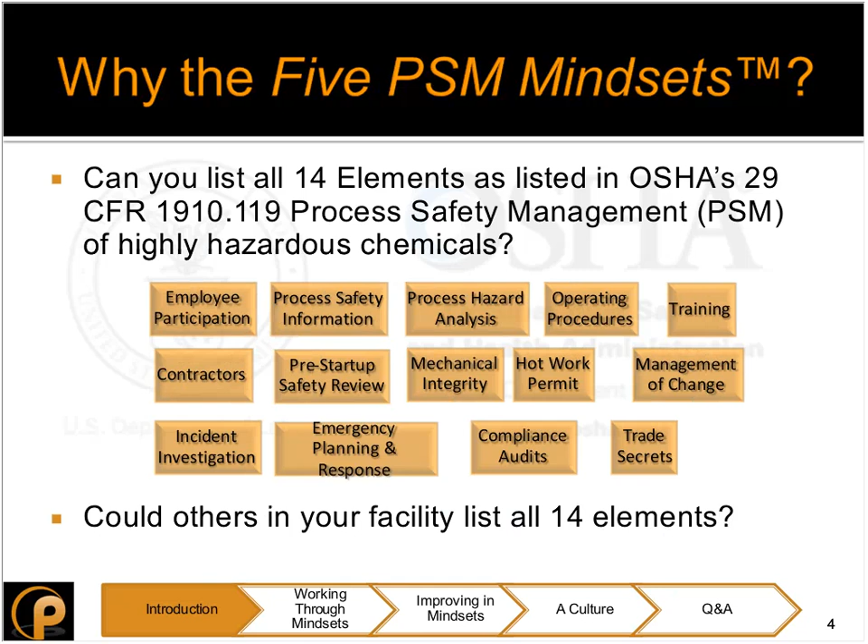Another question I have is, can you describe how your work connects to all 14 elements? So as you look through the elements below, do you see how your work directly connects to hot work permit, management of change, incident investigation, process safety information? Again, most people only see connection to the 2 or 3 that they're involved with directly on a day-to-day basis.

And a follow-up question to that, can the other people in your facility connect their daily work to the 14 elements?

The next question is a matter of coverage, being covered by PSM, and it really gets to the heart of why PSM is required. So is your facility covered by PSM? And if the answer is yes, are there components of your facility that are not covered by PSM? Most likely there's some area of coverage, and that's why you're calling in today.

But what I'd like to ask is, is the intent behind PSM restricted to just covered facilities? Covered facilities are spelled out in the standard as those having more than 10,000 pounds of flammable liquids or above the threshold quantity for chemicals in their Appendix A. We'll talk more about that to come.

Let's say you own a facility and you have an 8-foot tall vessel, 3 foot in diameter, and you have anhydrous ammonia, that's 3,560 pounds by weight. The Appendix A states that you have to have more than 10,000 pounds of anhydrous ammonia to be covered under PSM. Let's say in your facility you don't have any other chemicals that are in Appendix A or that meet the flammability quantities or guidelines. And so the conclusion is that you're not covered under PSM.

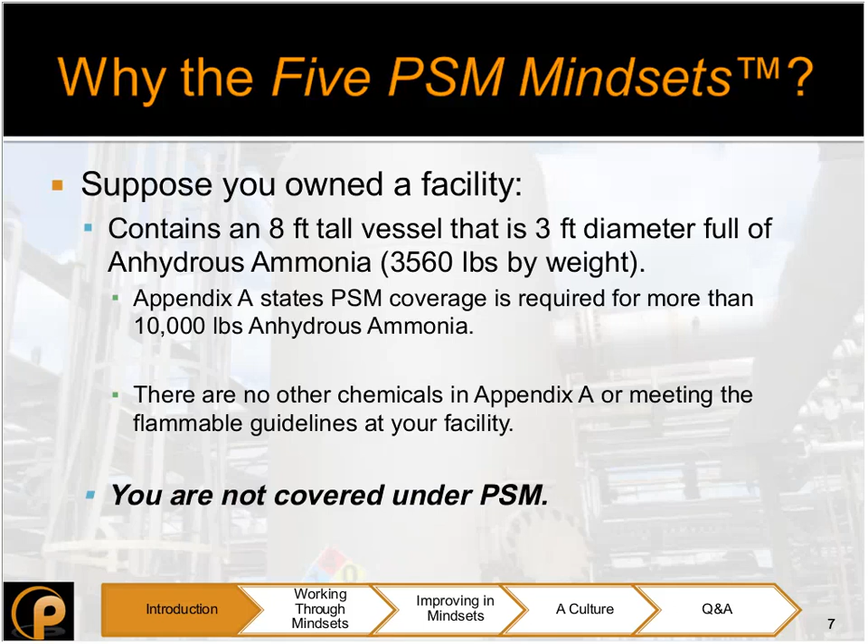But let's take this picture a little bit further and ask the question, again, picturing your 8-foot tall, 3-foot diameter vessel, and even picture it in the room with you there. As an owner of that facility, which of these 14 elements would you consider unnecessary for the safe and long-term operation of your facility?

Would you not perform mechanical integrity? Would you not gather and collect your process safety information? Would you not institute any kind of management of change or compliance audits? Even though you don't have to comply with something, would you be making sure that your procedures are actually doing what you said they do?

The real answer is that all of these elements, to some level of degree or detail, are necessary for long-term safety and prevention of a catastrophic failure, even for your small quantity of chemical.

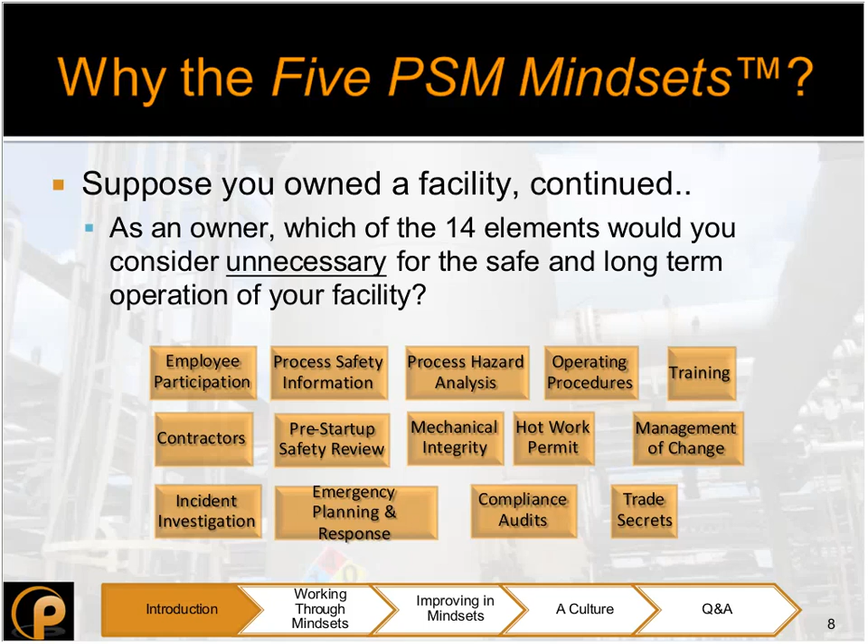The real point here is that it's not about a regulation. The PSM standard was an effort and a collaboration between the government and industry in the late 80s and early 90s to find ways to keep petrochemical facilities and the people working in and around them safe. You can make PSM as onerous or as simple as you decide, but it needs to be based on risk and practicality.

So you may have different levels and details in your documentation, but the reality is that all 14 of these elements can apply to any facility operating with any hazardous chemicals.

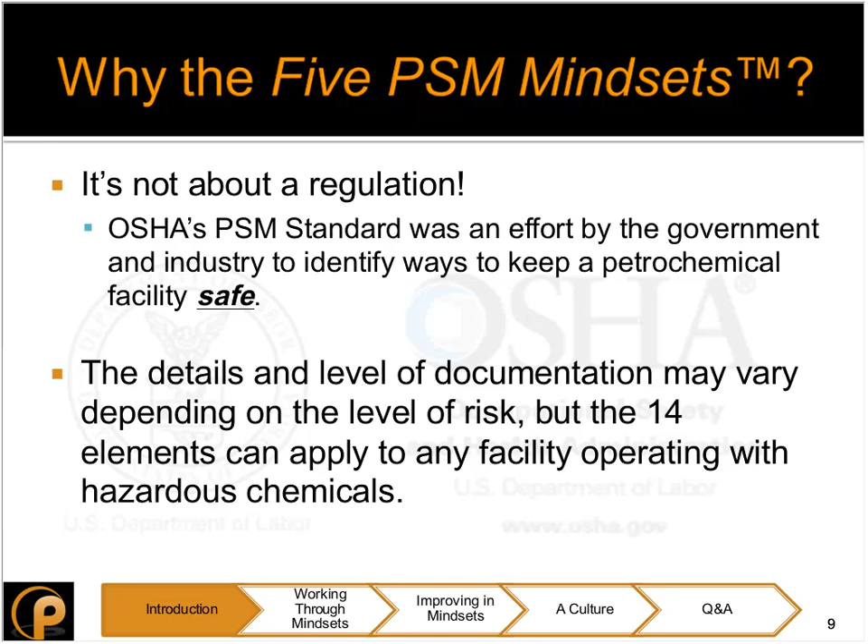So what we've done here is distilled the 14 elements into 5 PSM mindsets. Those 5 mindsets are: first, identify the hazard; second, communicate the hazard; third, protect against the hazards; reevaluate the hazards; and finally, transparency about the hazards. We'll go into more details about those in the coming slides.

They serve three main purposes. First, one of the first questions I ask is how many elements can you remember? Most people only remember 2 to 3. Some remember 5. If you work with it day-to-day, you may remember 10 to 14. But the 5 mindsets help act as a memory tool for recalling all 14 elements, and they're actually in order.

The second purpose is to help emphasize the intent behind the PSM elements, because it's not just about meeting a bunch of regulations, it's about keeping people safe. These mindsets can help focus in on what's important. And thirdly, getting back to this idea of PSM for everyday use, it helps simplify the approach to PSM for anyone in your facility.

So let's work through these mindsets and get an idea of what it means to work through the lens of each mindset. We'll start with identifying the hazards.

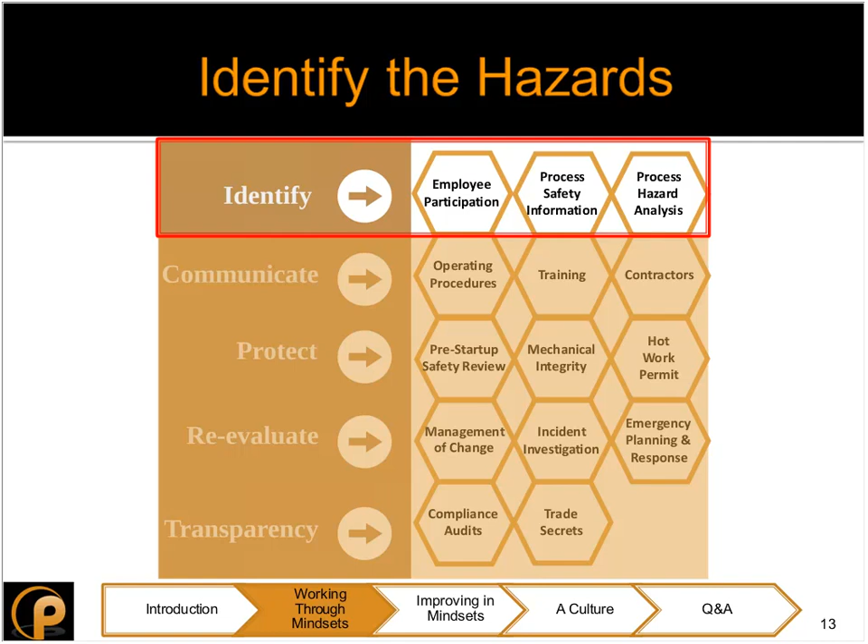If we want to be successful in identifying hazards, it's going to require employee participation. You need employees' observations, experiences, and situational awareness to be successful in identifying hazards. As an employee yourself, that is a responsibility that is on you and each one in your facility.

When I worked in a refinery, it was common to see employees who felt frustrated that they weren't being heard or that their ideas weren't being taken seriously. When I worked in distillation, I saw that operators in particular are on the front lines. They can tell you the warning signals they see from the process or from walking around the field day to day.

They were usually able to describe the issue. They may not have known the exact root cause or the chemistry behind it, but by listening to their observations and experience, that was key for effective troubleshooting and addressing the problems. So listening to your employees, and as an employee speaking out and participating in the process, is a critical first step in identification.

The next piece of successful identification requires accurate representations of reality, or solid process safety information.

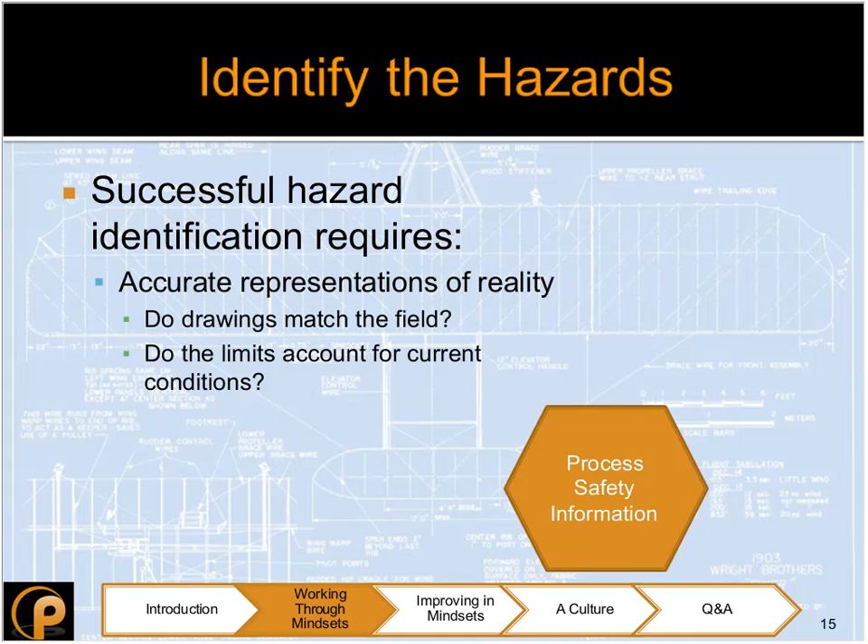And then lastly, in this mindset of identification, we have process hazard analysis. A PHA really brings together employee involvement and accurate process safety information, tied together through an effective methodology of your choosing. Even though PHAs can be grueling, this is where the insight from knowledgeable people can come together to explore what can happen and how to prevent it. A trick here is to not just use this as a paper exercise, checking the box that we did our PHA. Really use this as an opportunity to tie in the various process safety information coming from multiple departments, your mechanical integrity group, operations, engineering, and create a document or repository that can be a resource for anyone in the facility to better understand the hazards of any given drum or unit.

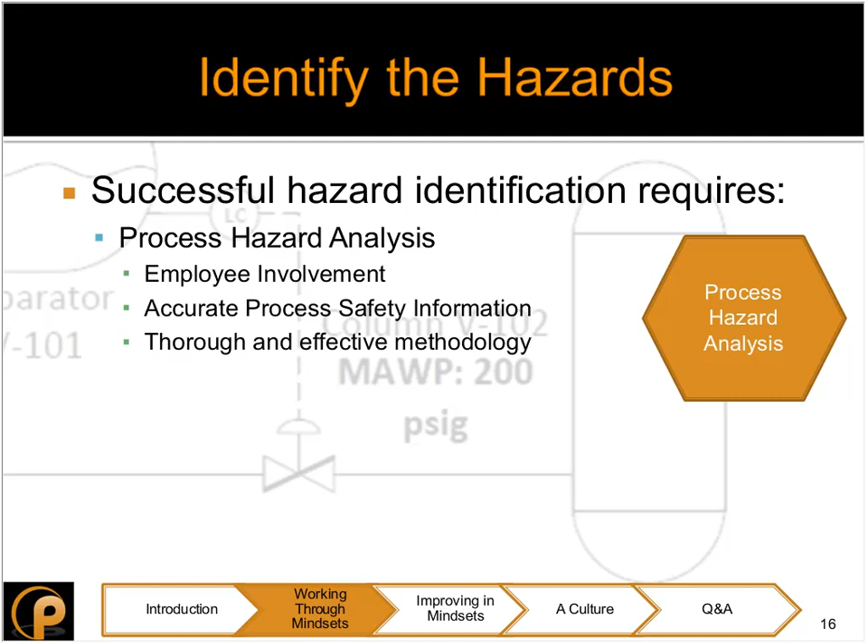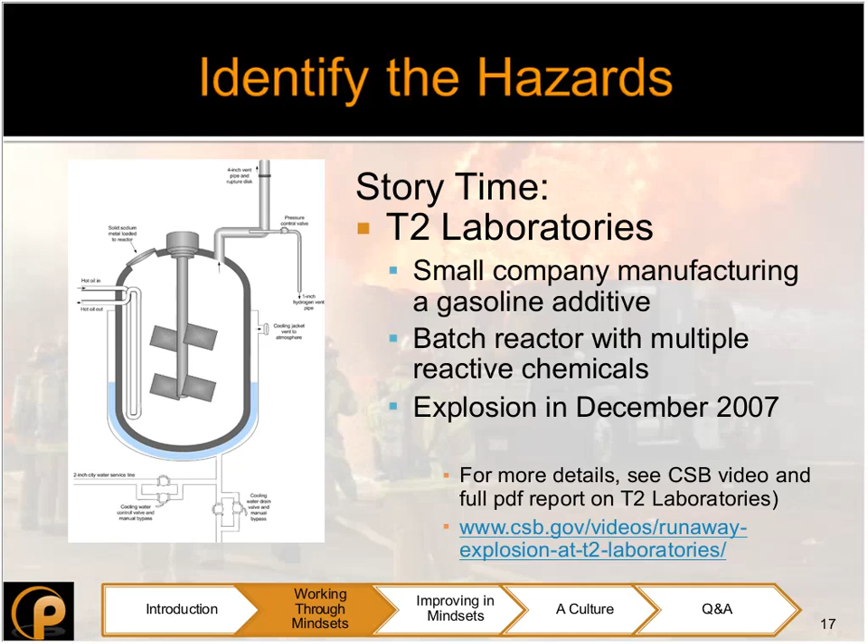What we're going to do as we talk through the various mindsets is tie it to a story about what happened to T2 Laboratories, a small manufacturing company that made gasoline additives out of Florida. They used a batch reactor with multiple reactive chemicals, and unfortunately they had an explosion in December of 2007. The CSB, Chemical Safety Board, did a video on T2 Laboratories that you can find by searching T2 Lab and CSB, and there's also a full PDF report that goes into more detail than we will cover here. But let's look at identifying the hazards.

Remember, there was an explosion here, so we're looking at things that could have been improved. The first piece is employee participation. They had two owners, a chemical engineer and a chemist, and though they had training from their degree backgrounds with reactive chemicals, they hadn't worked with reactive chemical processes in the field. So sometimes what you don't know, you can't participate in or contribute to. There was more experience they could have had.

Process safety information: because their reaction wasn't fully understood, they didn't have in the process safety information the fact that a runaway reaction could happen at high temperatures. They had tested the reaction up to 380 degrees Fahrenheit, but unfortunately the after-action review by the CSB found that at 390 degrees, just 10 more degrees, was where a runaway reaction would begin. Normally, if that had been known, it would have been included in their process safety information, but it was not identified.

And then lastly, process hazard analysis. This was not a PSM-covered site, so no PHA was required, and there was no documentation that one was performed. You may be tempted to say, well, that was them, we're PSM covered, it wouldn't happen here. But remember, if you have a check-the-box mentality of what's required and what's not required, you can still find yourself in the same pitfalls.

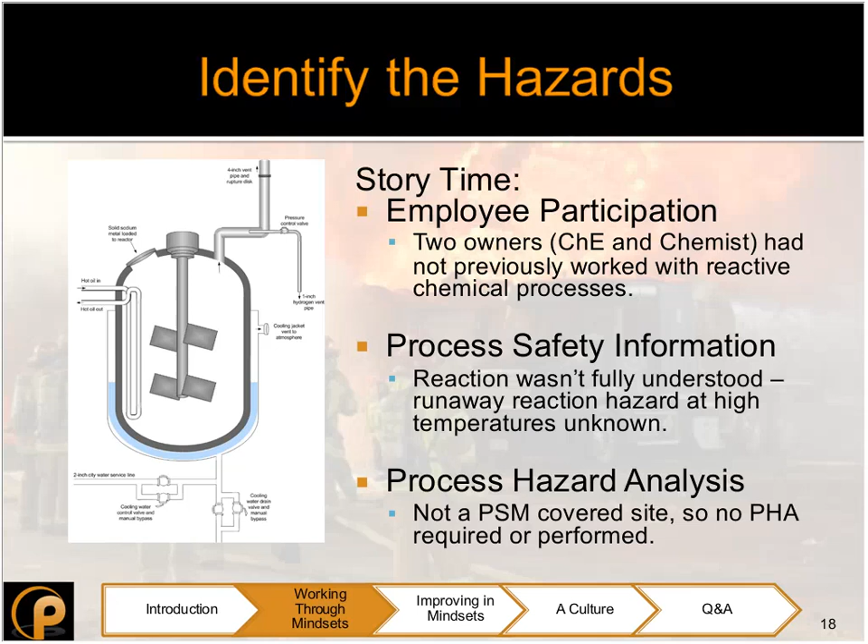So after we've identified the hazards, we'll come back to our story in a few minutes. We need to communicate the hazards in an intentional way. The PSM standard lists out operating procedures, training, and contractors as ways of communicating.

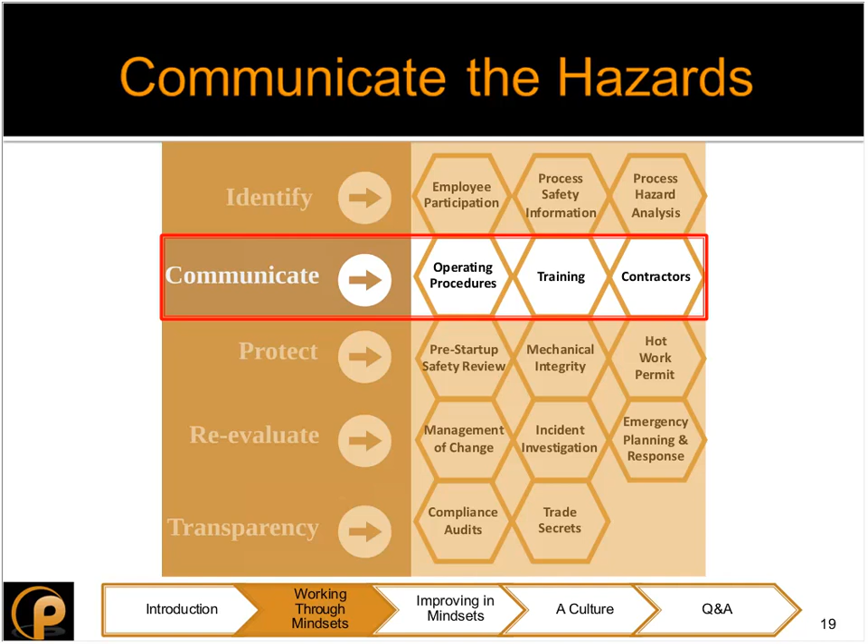So the first thing that communication successfully requires is procedures. Operating procedures are given a specific call out in the standard. Maintenance procedures show up in mechanical integrity, but operating procedures are where people are directly interfacing with the process as it's running, so there's a high risk involved. The higher the risk, the more detailed the procedures need to be. They help clarify expectations, reduce guesswork, provide a common approach, and should be accessible to all who need them.

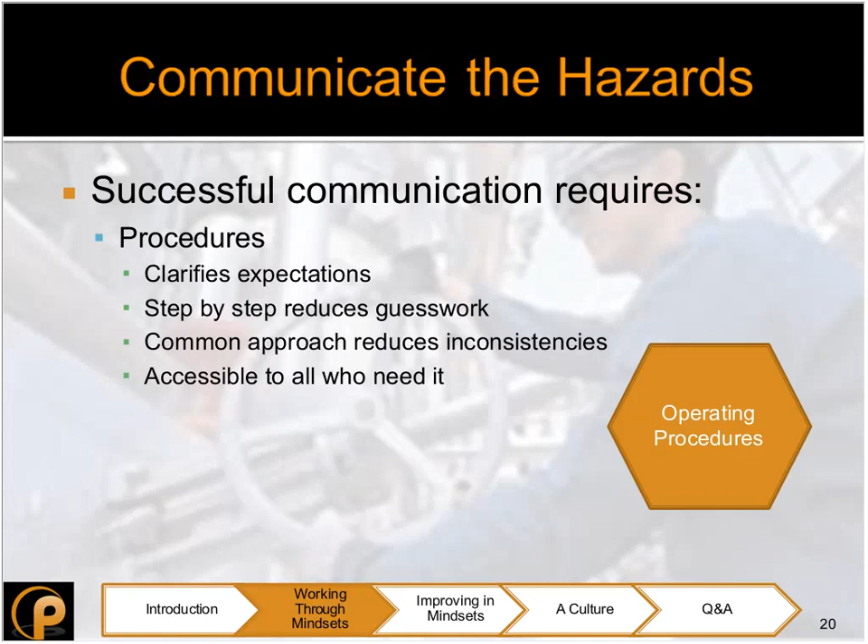So whether that's electronic format or paper copy, some procedures are done once a week or once a shift, and people are going to easily remember what they need to do. Other procedures, like catalyst regeneration, shutdown for turnaround, or emergency procedures, aren't going to happen on a regular basis. They could be years, or never have had to be put into place for some emergency procedures. So you don't want to rely on someone's memory, or so-and-so doing it a certain way, or having a little trick that works. You want all those things incorporated into your procedures.

The next piece is training. The idea of training is like training for a marathon or training to fly a plane or operate a unit - it's about proficiency. It provides a foundation of knowledge for everyone so that when you have discussions about hazards, you all have the same starting place.

That can be really helpful even for discussions around a JSA, a job safety analysis. The more people have a sense of proficiency and understanding of the unit, the better able they are to recognize hazards.

Lastly, under communication, we talk about contractors - getting everyone inside the gate on the same page and on the same team. That can be challenging with contractors. Typically that training is focused on your safe work practices or special hazards of chemicals.

For example, an HF alkylation unit is restricted - there's special procedures and precautions. But having a contractor knowledgeable on multiple units, on temperature hazards, pressure hazards, what the chemicals are inside - that can be challenging, particularly for pipe fitters, scaffold builders, welders, people crossing multiple units throughout a given day. So there's a challenge to use process overviews and work with operators to really understand those hazards, since that's not going to be their area of expertise.

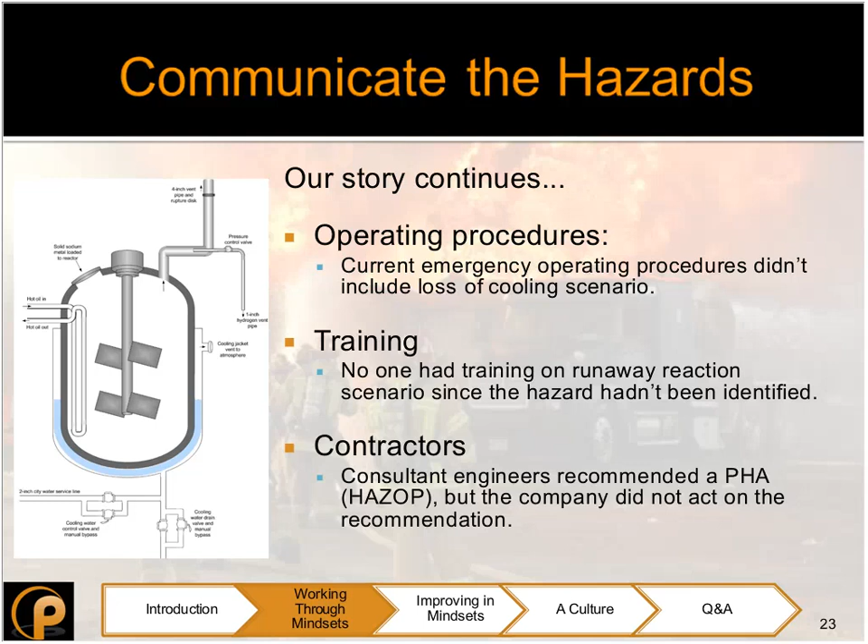All right, let's go back to our mindsets. Now that we've identified the hazards and communicated the hazards, all of that is with a goal to protect against the hazards. We want to protect our people and our assets from harm.

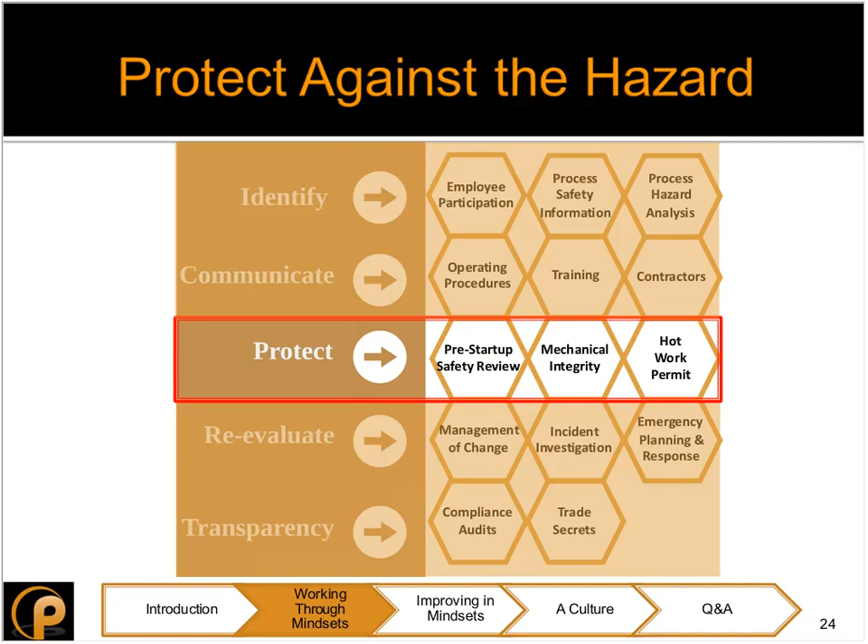So the first item here, first PSM element, is the pre-startup safety review, a PSSR. OSHA states that a change to process safety information is what triggers a PSSR. But in reality, any time something needs to be started up, it's wise to do some sort of checklist, punch list, a safety review.

Looking for plugs on bleeders, connections to instruments, gaskets in the flanges. Does the process match what the design was? Are the safeguards we're counting on really there? Maybe we shut down, we started up - are the instrument levels operating and functioning on the boot of the drum? Is anything missing? Is all the documentation and training in place, ready to go? Because if we start up and have an issue, we don't want to not have procedures in place, or people not already proficient on how to act on those procedures. Really asking the question, are we really ready to put hazardous material inside?

And as I said, the higher the risk, the greater level of detail needed. So whether you're covered or not, some sort of checklist is advisable.

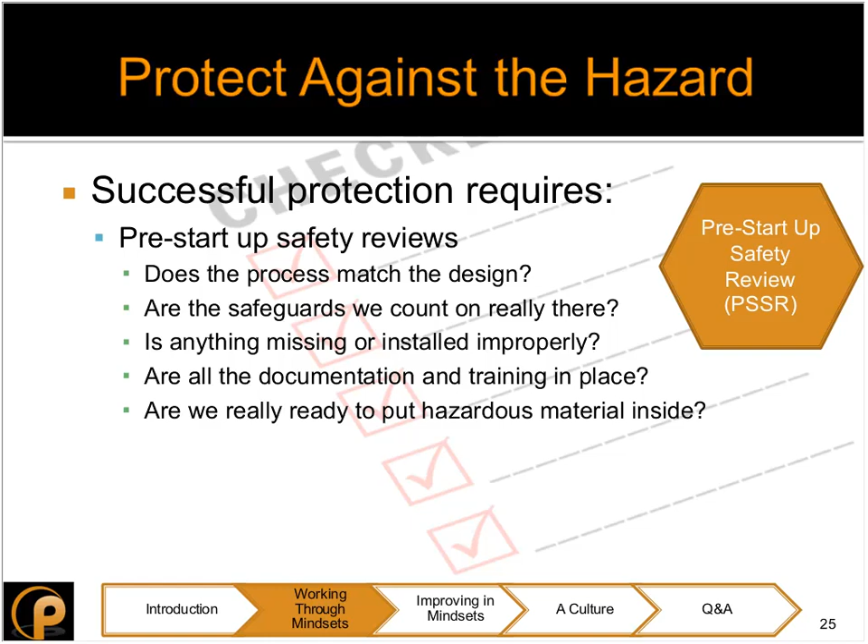If we go to mechanical integrity, it's the next piece of a successful protection. Is the equipment going to perform as we expect? Can we detect any indication of failure, corrosion, fatigue, wear? And what can we do to extend the reliability and life of the equipment in service?

I know as a chemical engineer, when I was acting as a process engineer, it was easy to consider mechanical integrity more of a mechanical engineering function. The group was mostly mechanical engineers. But honestly, the most effective MI programs I've seen involve the combination of bringing process engineers, mechanical engineers, maintenance supervisors, operators, bringing them all together as a group, just like the idea of bringing together people for a PHA, and study the unit or the equipment as a whole, looking for trends month to month.

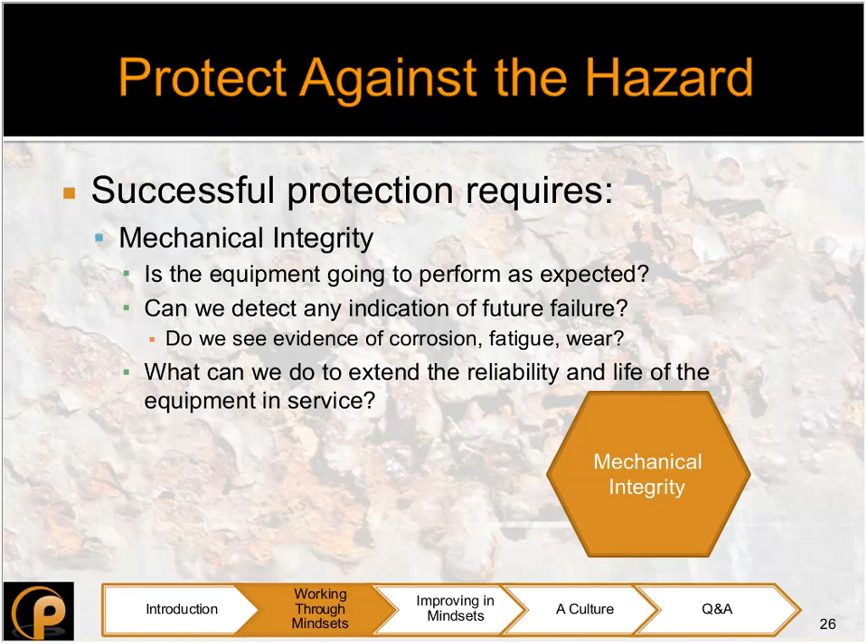Again, looking at recurrent issues like this relief valve keeps plugging, we have to change it out every year. Is there a way to extend the life of that? What is happening upstream? What can we do to improve that? And look at it as a team.

And lastly, under the banner of protection is hot work. And I listed other permitting as well, but hot work is specifically called out in the standard. Is there clear procedures, communication before the hazardous work is done? Is our environment ready? Is the equipment ready? And is everyone aware of and prepared to address our hazards?

And really, hot work permitting is a short paragraph in the 119 standard, but it references another standard with a lot more details. It's sometimes easy to overlook.

As a chemical engineer, if you are doing design, you are probably not involved directly in welding on a piece of equipment or clearing it out for that welding. But keep in mind that every time you specify a new nozzle or a bigger piece of pipe or a new run of pipe, you are the first in a chain of events that leads to hot work. And so you're connected to it even if you may not see that in your day-to-day work.

And again, it's a very serious issue. Many people have unfortunately been killed. Even my friend's father was killed 30 years ago welding in a tank car that was not properly cleaned. So it's a very close to home issue.

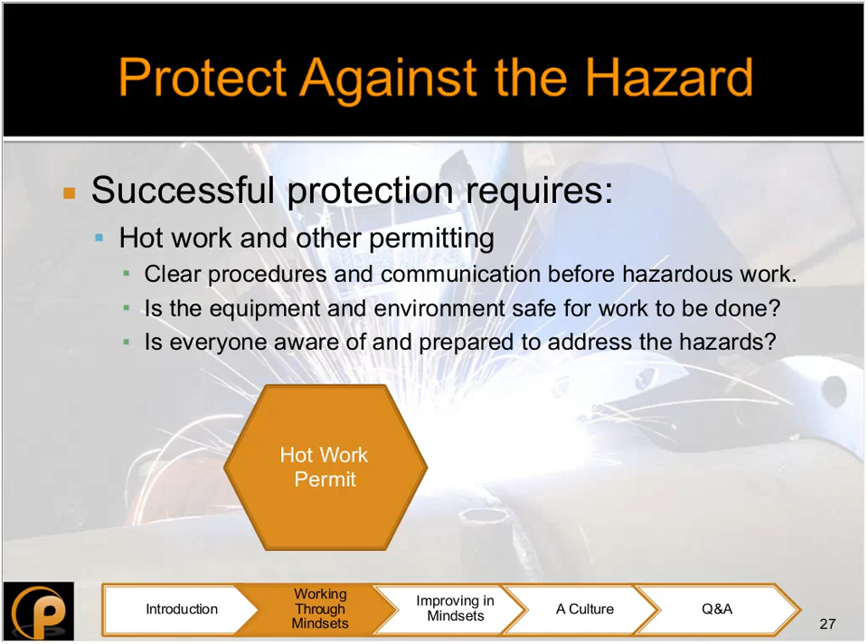And just a reminder that these procedures, each one of these elements was put in place often because people died without them.

So let's go back to our story. For the PSSR, protecting the hazards, because they were missing a robust hazard review and some key operating procedures when they started up this unit, there were gaps in their operation.

Mechanical integrity: there was one cooling water source. There's no record of specific preventative maintenance on the supply valves. And again, a team of people looking at this either through mechanical integrity or through a PHA may have identified that these needed to have a backup or some other preventative protective measure.

And then finally, hot work: there was no hot work going on at the time of the incident. The only item of note is that the reactor vessel was previously a steam generator, and the new nozzles put on to change the service derated it from 1200 to 600 PSI.

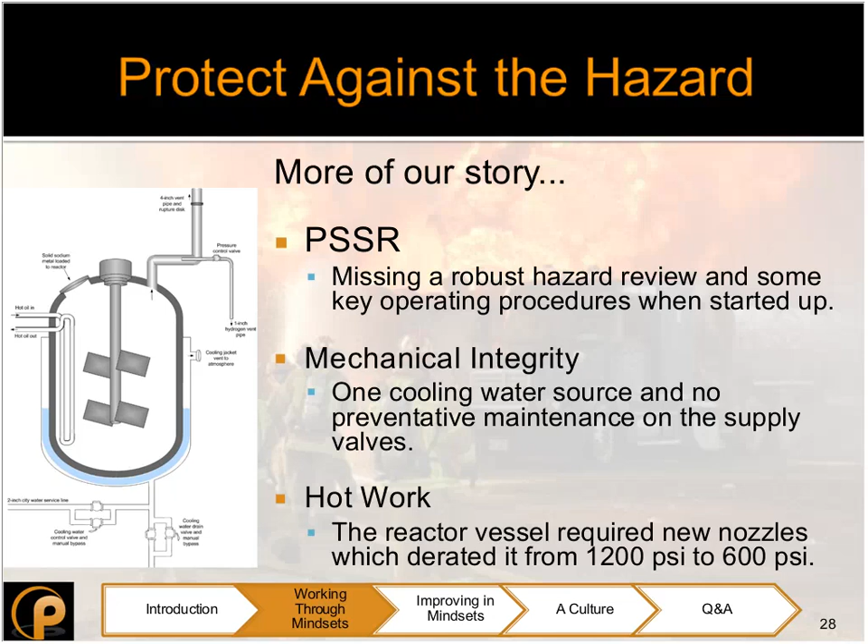So as time progresses, you need to reevaluate the hazard. You've identified, communicated, protected, but you need to remember that you can never assume PSM is a done deal. There's always changes, inside and outside, that need to be taken into account.

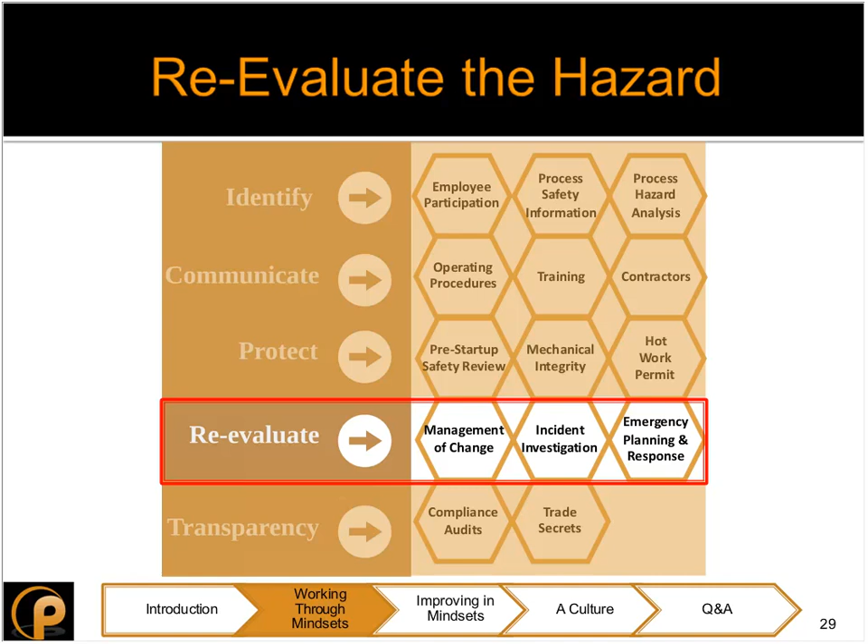So first we look at management of change. A robust management of change will help give you a successful reevaluation. Looking at the long-term impact, new challenges, new hazards, is everyone prepared for the changes, and then documenting what changes really happened. Is what we said we put out there really what's out there, and if not, let's make sure everyone's on the same page.

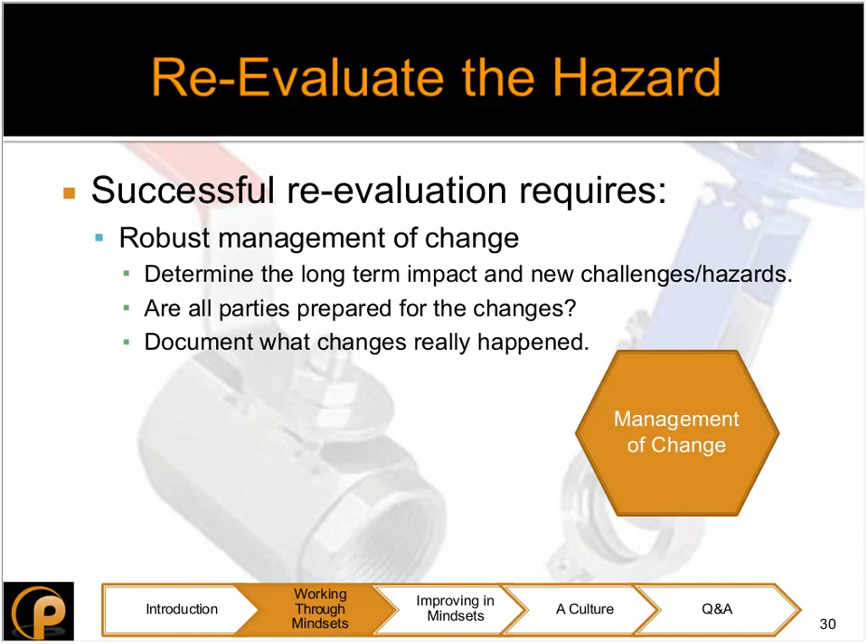It can be easy to get bogged down in management of change in the checklists and the different boxes, the approvals, the processes and procedures. But the real question is whether the MOC process is robust and can really address the hazard of the change. You can have something as simple as a paper version that you take to each person to review and approve, or you can have something as complex as an intranet system with electronic signatures and automatic routing to the next level. Again, the higher the level of risk, the more detail that's needed.

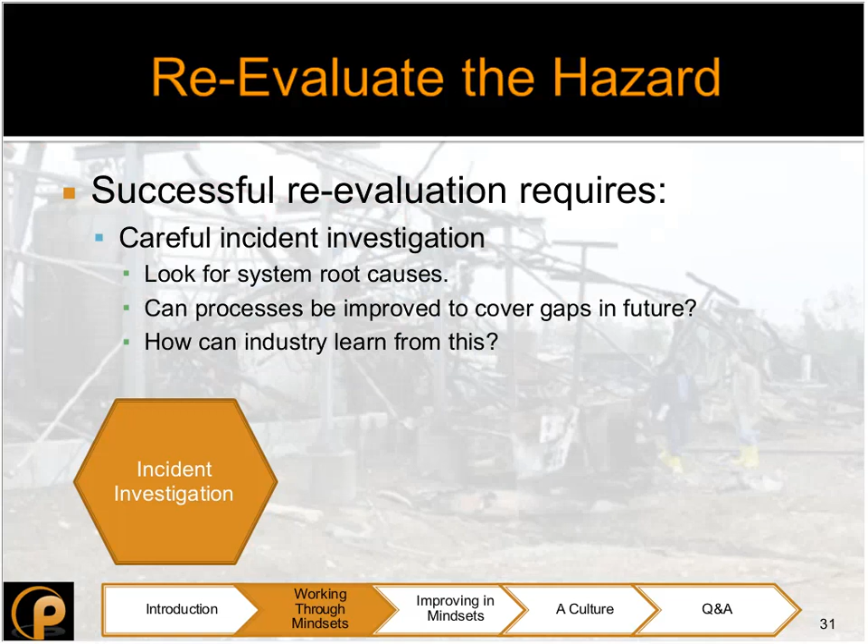The next piece of reevaluation is your incident investigation, looking for system root causes, looking for ways to improve processes that may have gaps, and then sharing that with industry, not just within, but without your facility. You know, even near misses, asking the question, what process or system failed us and might fail again?

And this is where those CSB reports, Chemical Safety Board, if you've not ever gone to the websites and looked at those, I would highly recommend it. They have videos on a tremendous number of topics. And seeing what's gone wrong in the past at other sites can be extremely helpful, and you benefit from those lessons learned without having to experience your own incident. That's really the whole purpose behind it.

And then lastly, under reevaluation, I've listed the emergency planning and response. It's a way of reevaluating your hazards with an eye to the community themselves. So involve the community responders. Who's responsible for what hazards are on site, and how are you going to address them? Having mock drills and some what-if scenarios for everyone that's part of that process really can help bring to light any gaps and opportunities for better communication and better networking between all the people. And this includes your on-site as well as your community, fire, police, ambulance, all the responders.

For example, if you have an HF alky unit and you need the hospital to be aware of what to do with a patient who maybe sustains an HF burn. Having that communication in place beforehand saves time and lives.

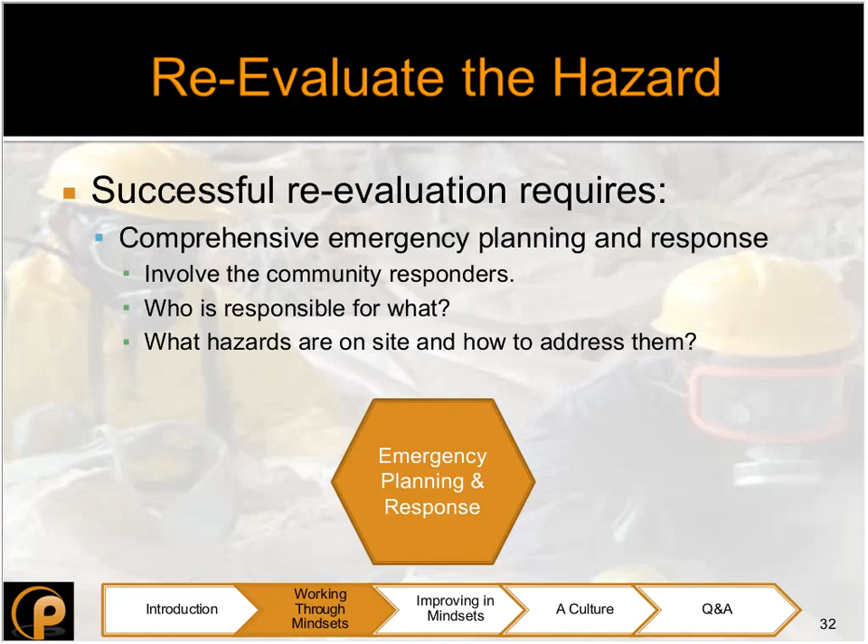Let's continue our story. Going back to T2 Laboratories, over the course of the 2 years that they were operating, their batch sizes increased by 30%, but there was no change to the cooling system they had in place, and the relief requirements didn't change either, which was based on the small amount of hydrogen that could be made at the time. The incident investigation piece: when they were first doing bench scale testing, 3 of the first 10 batches had some unexpected exotherms. If they had gone back and questioned that, they may have identified that 390-degree trigger point, but unfortunately they changed the formula and then never went back to find out why those exotherms happened.

The last piece, the emergency planning and response, they did get with the local firefighting people who had inspected the site. They did drills for the sodium metal, one of the main products, or reactants, used. But again, emergency planning and response, as important as it is, it's also an after-event precaution. So it's after you've had the incident that this comes into play. And it was good that the responders were able to come in and use that information, but it was too late to really support the people who were injured.

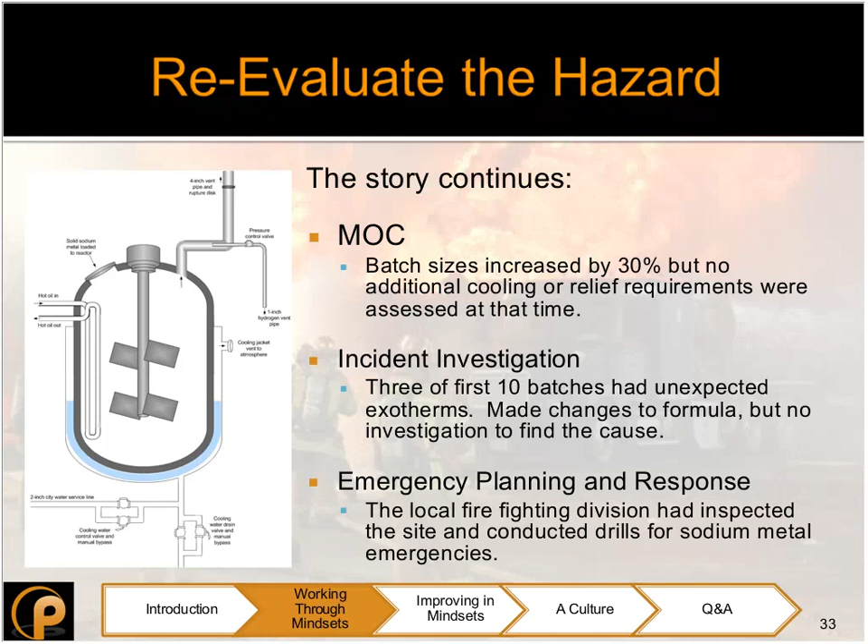And the last mindset is transparency about the hazard. So first off is compliance audits, honest compliance audits. Auditing isn't just about trying to follow the regulation, are we going to get fined by OSHA or not. It's about finding out what's working, what isn't working, and why.

And are we documenting what we need to document? That's important. Are we following our processes? Going back to the discussion of the MOC process, if it's so tedious or complex that no one's doing it correctly, then what do we need to do to change it so that it's going to work? Do I need to simplify it? Do we need to train people to proficiency in it? Do we need to get better buy-in so that everyone's on board and understands why we're doing what we're doing? Or does it need to be a different format? Maybe it needs to be electronic to simplify the amount of work that people are doing.

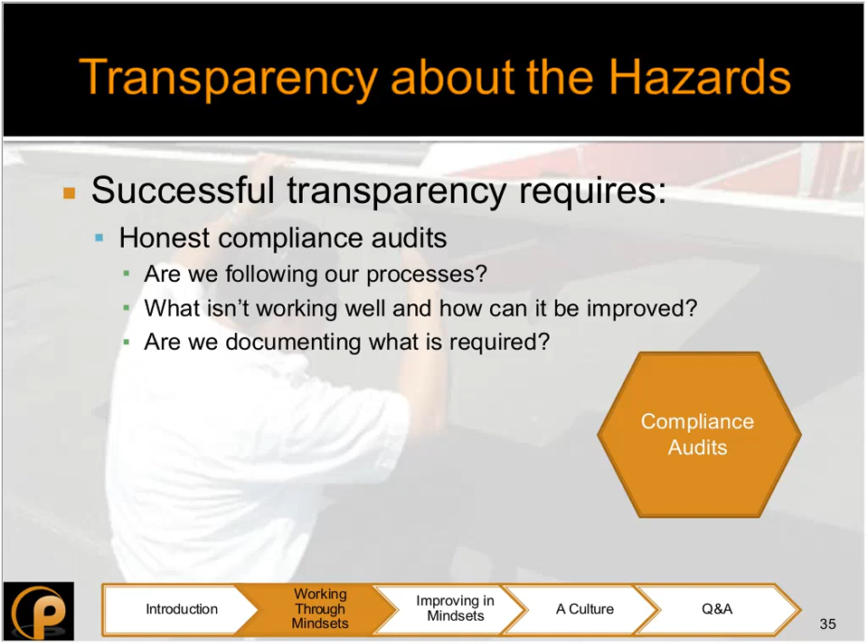And lastly, trade secret awareness. You can use confidentiality agreements to protect information, but it's important to make sure that the hazards are fully disclosed. This may not be something that you deal with on a day-to-day basis, but an analogy is: make sure the super secret brownie recipe with the ground up peanuts in it isn't going to harm the guest with the nut allergies. Make sure that you're disclosing what needs to be known to other people for their protection.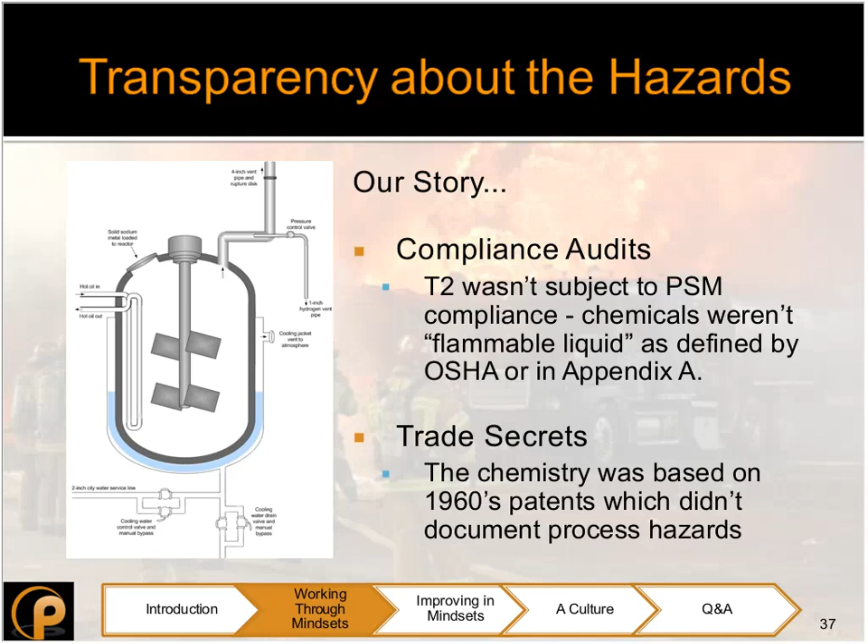And we go back to our story, T2, again, because T2 wasn't subject to PSM compliance, they did not do any audits. And if they had even just had internal audits, they may have identified some of the missing components. They may have found, wait a minute, we haven't really addressed the changes we've done, we don't have a procedure in place like we should, et cetera. So just because they didn't have to comply with the law, they had opportunity to do internal audits and check their procedures. And then trade secrets: the chemistry for this was actually based on some 1960s patents, which typically document the process chemistry, but not the hazards.

So let's talk now about improving the 5 mindsets.

In identifying the hazards, remember we have identify, communicate, protect, reevaluate, and transparency. So identifying the hazard, ask questions often. Deepen your understanding of the chemistry, the processes, look for inconsistencies. What's different? Is the temperature on the reactor bed going higher? Is that normal? If not, what's going on? Talk to your operators, talk to people to really understand what's happening and get that heartbeat of the unit.

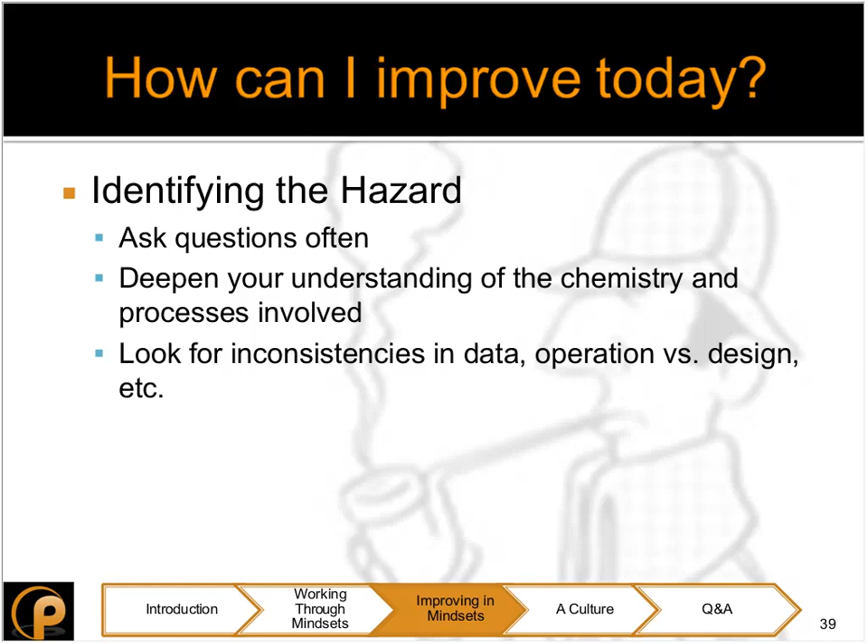Just asking the question, what if T2 Laboratories had sought out some additional expertise in the reactive chemistry, and specifically the reactive chemistry they were using? What if they had performed a PHA? We do some mock presentation PHAs in our training, and every time people identify that loss of cooling water as a potential hazard, and that could have saved them that day.

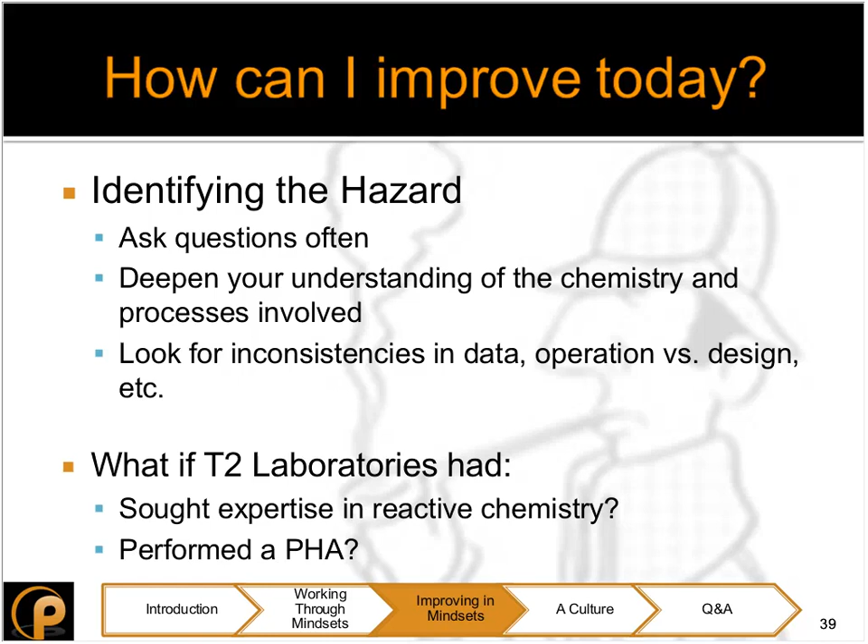Communicating the hazard. Find out if people in other groups know what you assume they know. Most of the time, there's a gap from what you think they know and what they really know or what they have access to on a daily basis. Network with other groups. Help facilitate that smoother communication.

Remember that collaboration in a PHA, in the mechanical integrity group, in management of change, that collaboration is really what brings all the different eyes on a system, on a process, and helps identify the hazard and helps bring about great ideas for protecting. And then ask yourself the question, is it enough to inform other people, or do you need to ensure they have a deep understanding? Should you be doing some question and answer sessions? Should there be some hands-on approaches rather than just an email with some drawings?

And coming back to T2 Laboratories, what if they had, again, listened to their contractors in that two-way feedback to perform the PHA? And if they had known about the reactive chemistry, what if all their personnel had been trained in that chemistry and in the procedure for a cooling water failure, if they'd had that in place?

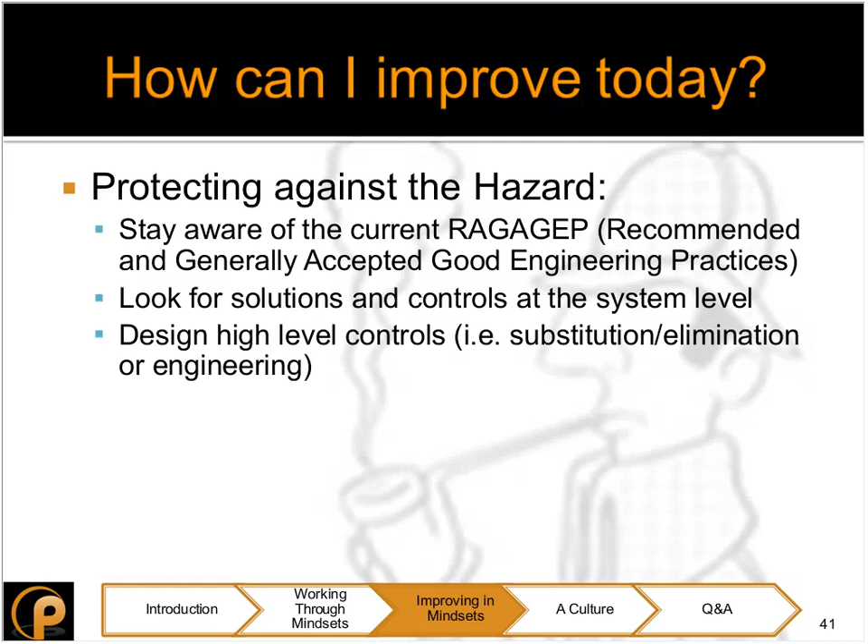Look for solutions and controls at the system level. Not just what can we do to improve this pump's reliability, but what can we do for all of our pumps. And look at design from a high-level controls, like the hierarchy of controls, substitution or elimination, or engineering controls. Can we eliminate HF acid exposure altogether by using inline samples instead of having an operator filling a bottle?

Going back to our T2 Laboratories, what if they'd been able to design, maintain the vessel, the cooling system, and the relief device all with a runaway reaction in mind? That may have had a significant impact.

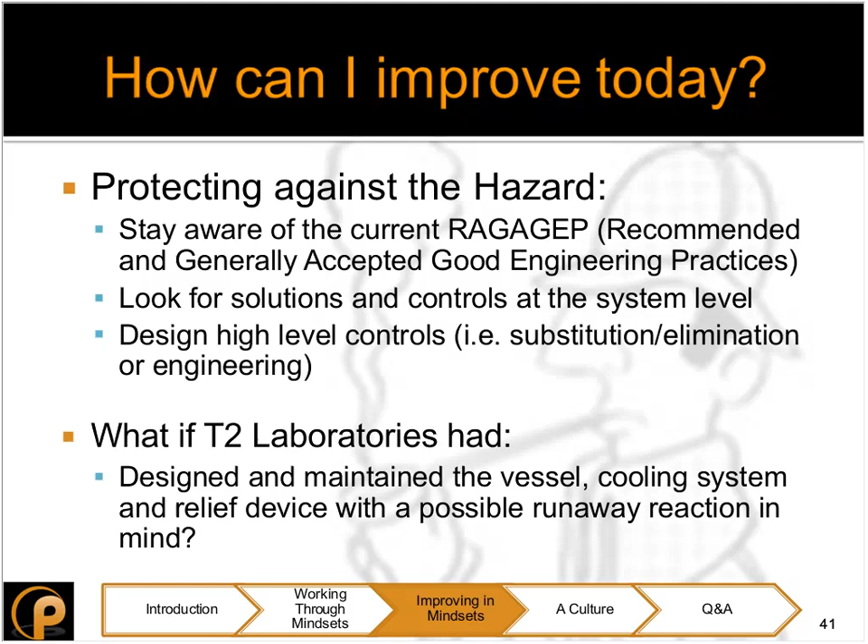Next, we come to reevaluating the hazards. Look for those big impacts from the small stuff. Do you have the right people involved in the discussion? How can we share what we've learned or what we've changed?

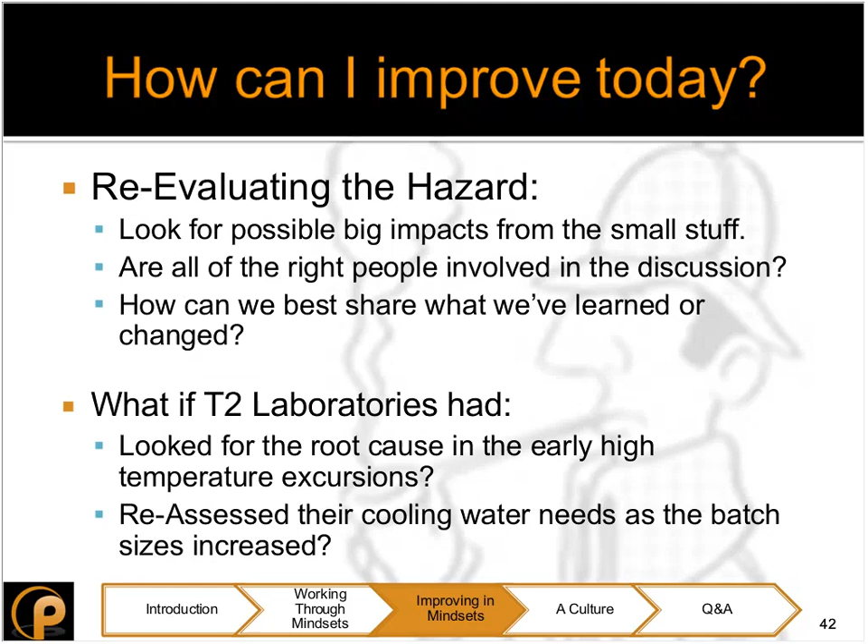And what if T2 had been able to, had they looked into the root cause in those temperature excursions? Would they have found that magic 390-degree number? What if they had reassessed their cooling water needs as those batch sizes increased and either changed their cooling method, brought in additional cooling water sources? There may have been a very different story.

And then transparency about the hazard. You may not be involved in compliance audits, but you can do mini audits or frequent informal reviews that can find out the barriers.

Ask yourself, am I following the procedures? Am I tempted to skip steps? And what are the internal or external barriers that are in the way? Is there a more effective way to get to the same goal? And can I be part of that change?

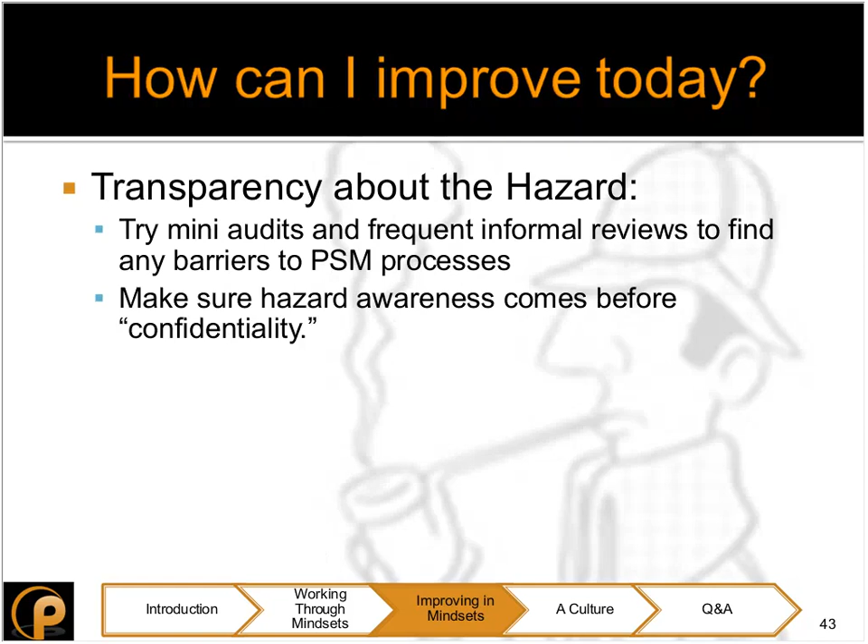And then lastly, make sure your hazard awareness comes before concerns about confidentiality, which can still be protected. What if T2 Laboratories had been able to converse with others who were making this proprietary product? There was another company, but they were competitors. And that's where places like AIChE, where you're discussing high-risk events and sharing across the board, even with competitors, can have so much power. What if they had embraced the culture of PSM even though compliance wasn't required?

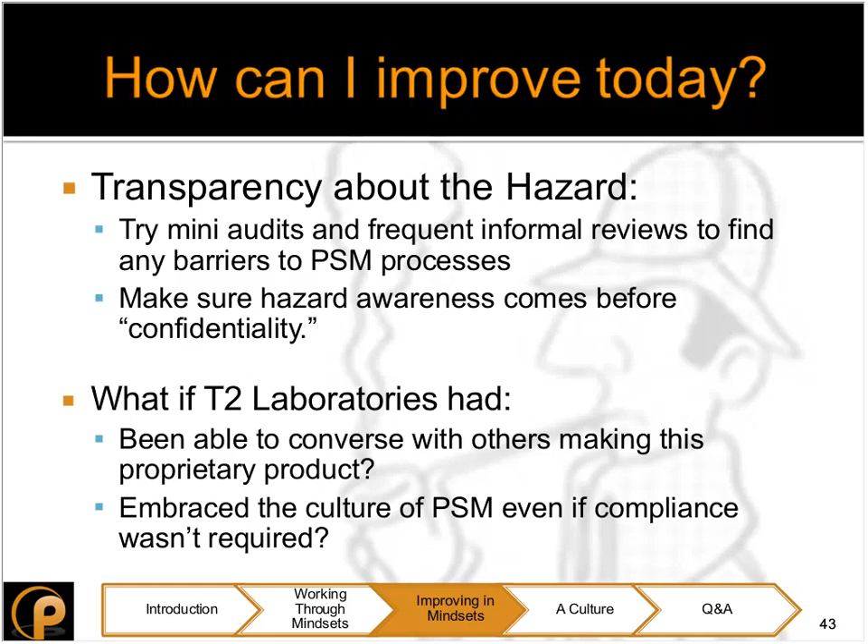And that brings us to our final point today. It's about culture. Having a compliance-only mindset is part of what got T2 into trouble. They didn't have to comply with the regulations. Four people were killed, 32 in the surrounding community and in their facility were injured, and the facility was never reopened.

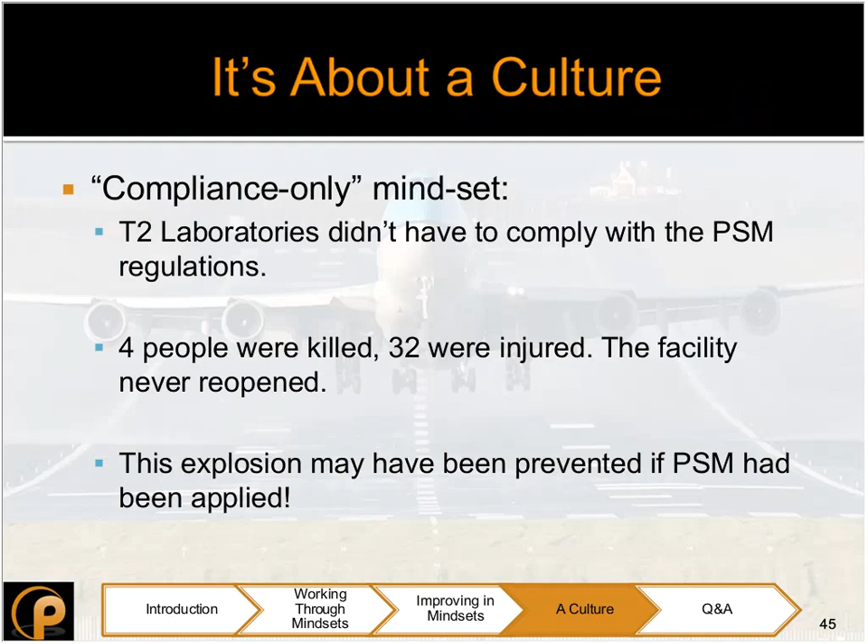This explosion, which was significant, especially if you look at the videos and read the descriptions, may have been prevented if PSM had been applied, if that mindset and approach had been used. So how much more for covered sites should we apply that mindset and make sure everyone's on the same page?

And you may say, well, I'm covered, that's not going to happen to me. But I would challenge you, don't settle for a check-the-box compliance-only approach in your facility and in your work every day.

Help create a PSM culture, and tools like the 5 Mindsets can help simplify that message. They can create a scaffold for more detailed procedures and discussions to be built on. So you can start simple and then build on the detail later. And it really helps employees see how their work connects every day, how they can improve, how they can contribute, how they can participate, and bring PSM into their everyday work.

With that, I want to say thank you, and I'll hand it back to Pamela for questions.